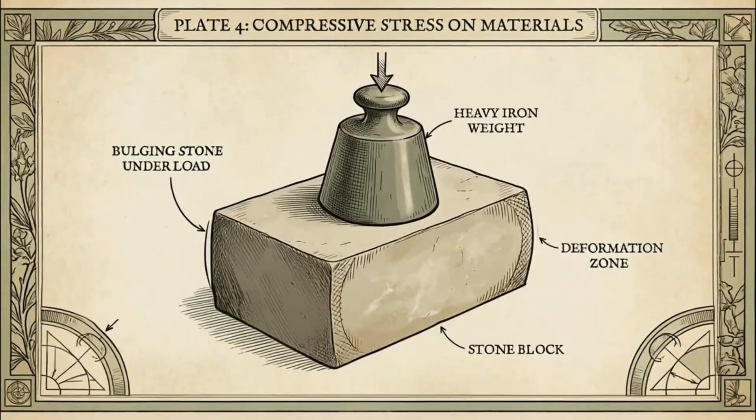Every structure follows 4 rules. Break just one, and it fails. Not because the material is weak, but because of how it behaves under load. Those 4 rules are strength, stiffness, stability, and synergy.

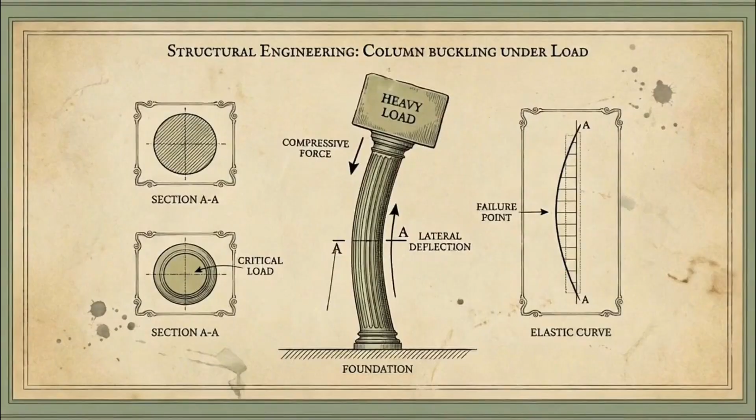Most people only think about strength, but strength alone is not enough, because structures don't just fail by breaking. They fail by bending, by becoming unstable, or by not working as a system. To understand why structures succeed or fail, you have to understand how all 4 work together. Let's start with the most intuitive: strength.

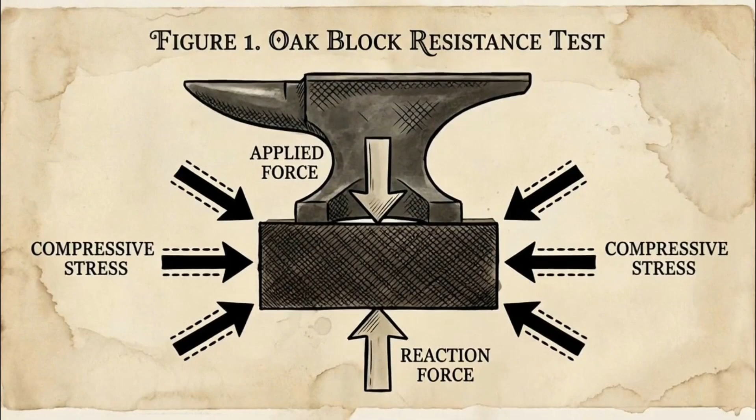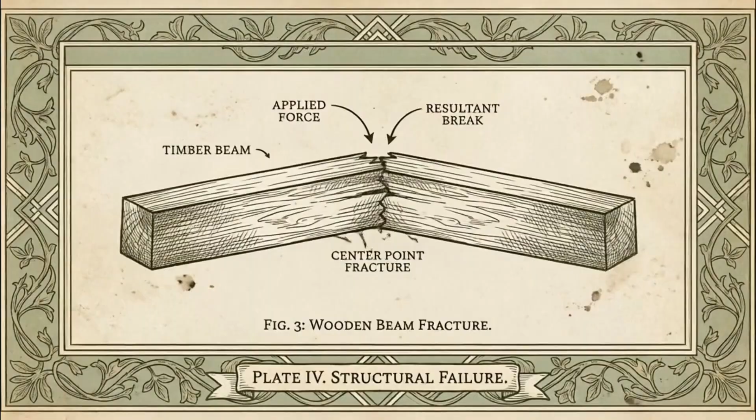Strength is the ability to not break. When a beam carries load, it develops internal forces. The top gets compressed, the bottom gets stretched, and if those forces become too large, the material fails. That's the simplest form of structural failure. And in brittle materials, like concrete or unreinforced masonry, this can happen suddenly with almost no warning. So strength is about survival.

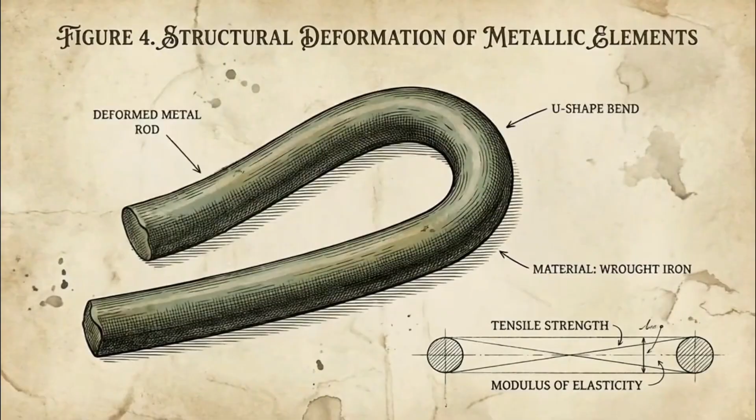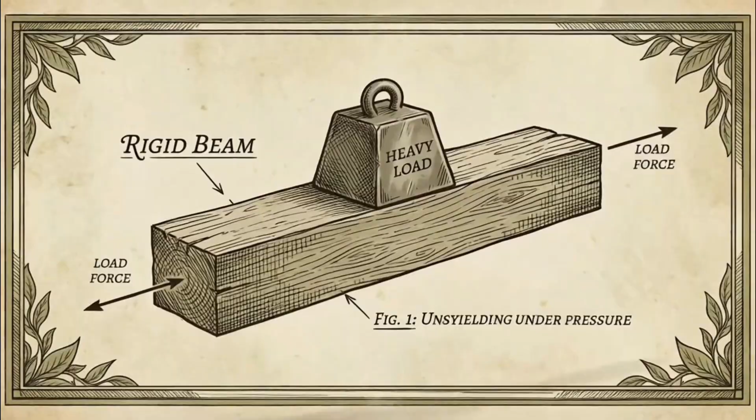But here's the problem: a structure doesn't have to break to fail. And this is where most people misunderstand how buildings work. Because many failures don't start with breaking, they start with bending. This is stiffness. Stiffness is the ability to resist deformation. 2 beams can carry the same load without breaking, but one might bend much more than the other. And that difference matters, because excessive deflection creates real problems.

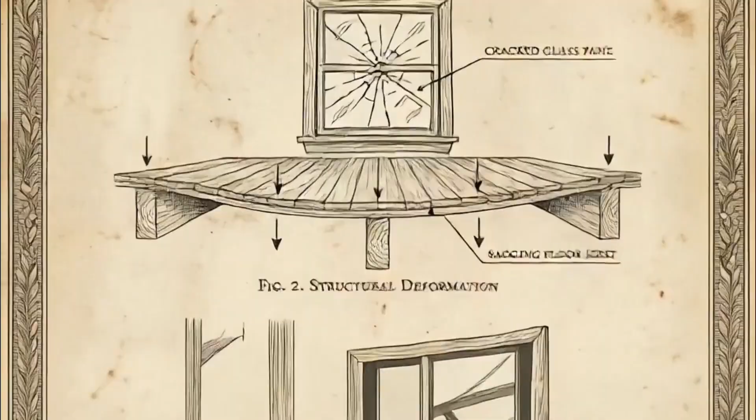Floors feel soft, beams visibly sag, walls crack, doors stop closing properly. The structure is still standing, but it's no longer performing. That's a stiffness failure. And stiffness is not just about material, it's about geometry.

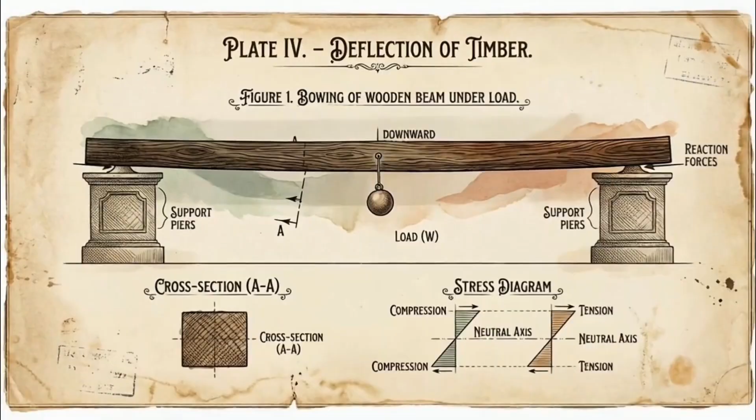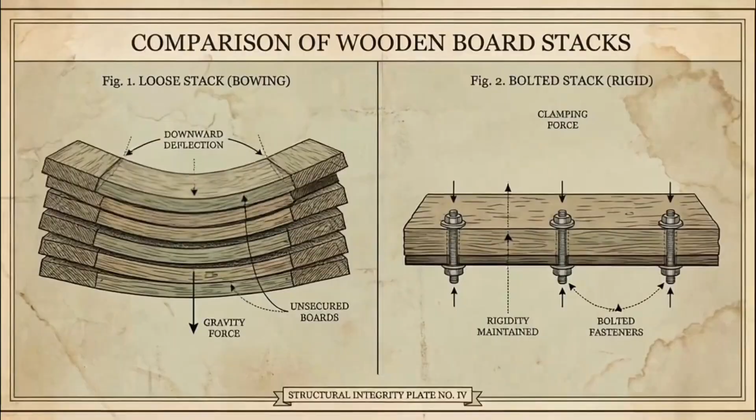Here's where things get interesting. Take a single wooden board, it bends easily. Now take multiple boards. If you just stack them, nothing really changes. They still bend, but if you connect them, so they act as one piece, everything changes. Now the structure becomes dramatically stiffer. Not twice as stiff, not 10 times, but sometimes hundreds of times stiffer. Same material, same amount, completely different behavior.

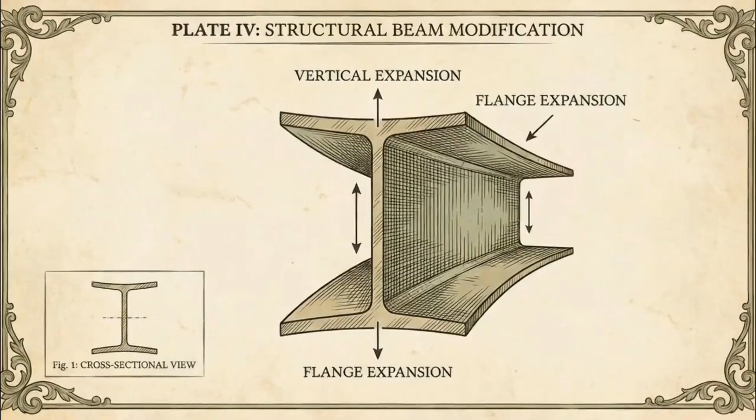And the reason is simple: material placed farther from the center works harder. So when you make a beam deeper, you're not just adding material, you're placing it where it matters most. That's why a tall beam is exponentially stiffer than a flat one. And this is one of the most important ideas in structural design. Performance is not just about what you use, but where you put it.

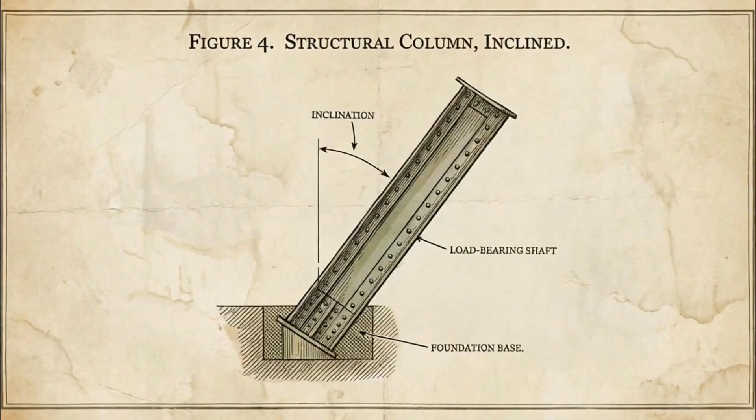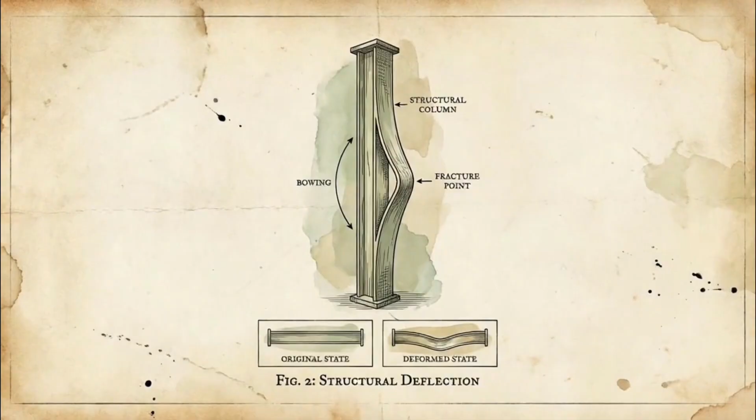Now, even if a structure is strong enough and stiff enough, it can still fail. Not by breaking, not by bending too much, but by losing its balance. This is stability. Stability is the ability of a structure to maintain its position and shape under load. Because sometimes failure doesn't come from the material, it comes from the geometry. Take a vertical column. Under compression, you might expect it to simply crush. But in many cases, it doesn't. It bends sideways and collapses suddenly. This is called buckling, and it can happen even when the material itself is strong enough.

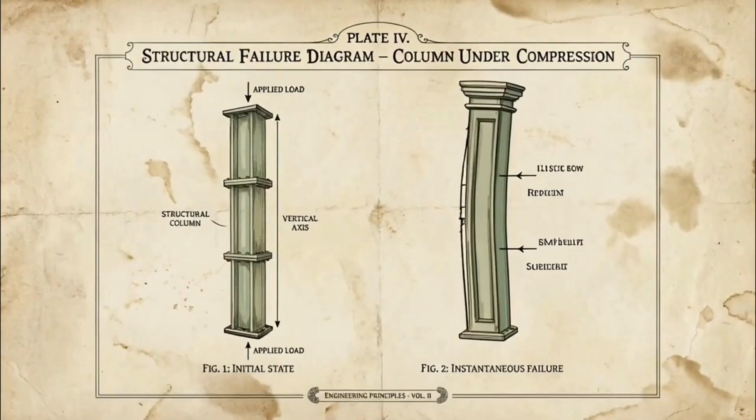What matters here is not just the material, but the proportions. A short, thick column can carry a lot of load, but a tall, slender one can fail much earlier. Same material, same load, completely different outcome. Because instability is driven by shape, and the dangerous part is, it happens suddenly. There's often no visible warning. The structure looks fine right until it isn't.

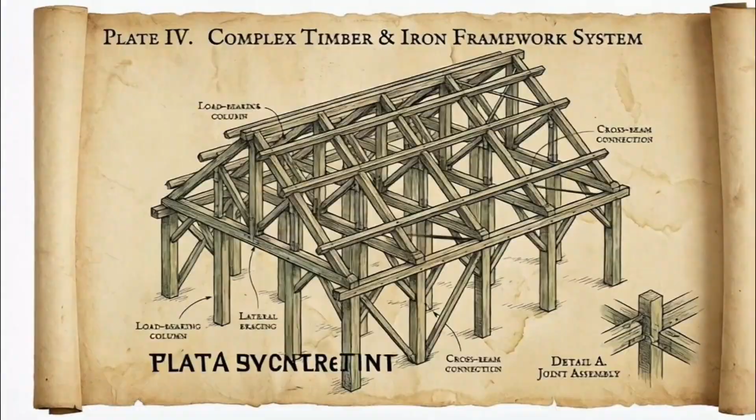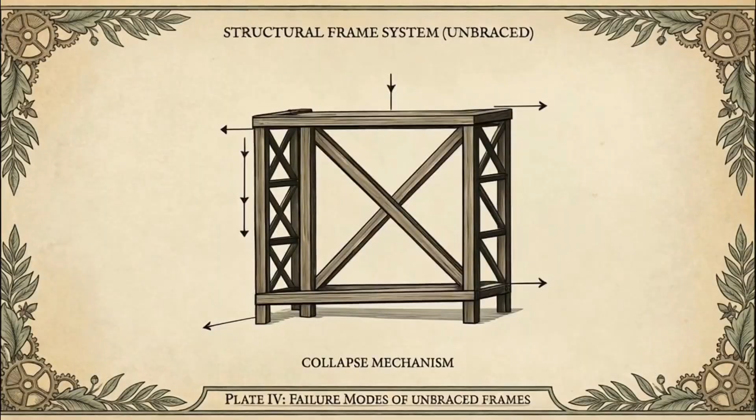And this doesn't apply only to columns. Entire systems can become unstable. A frame without proper bracing can collapse sideways under lateral forces, like wind or seismic movement, even if every beam and column is individually strong enough. Because stability is not about individual elements, it's about the system as a whole, maintaining equilibrium. So strength prevents breaking, stiffness controls bending, but stability is what prevents sudden collapse. And without it, everything else can fail instantly.

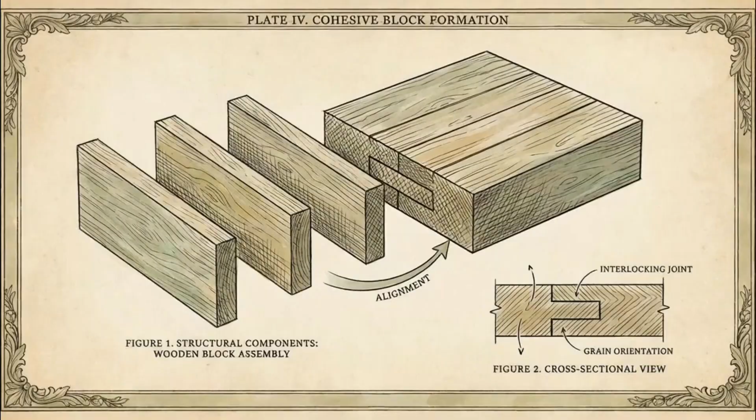Now, even if a structure is strong, stiff, and stable, there's still one more thing that determines how it actually performs. And this is where design becomes much more interesting. This is synergy. Synergy is the ability of all the parts to work together as a system, because a structure is never just one element. It's a collection of components. Beams, columns, connections, and how they interact can completely change the outcome.

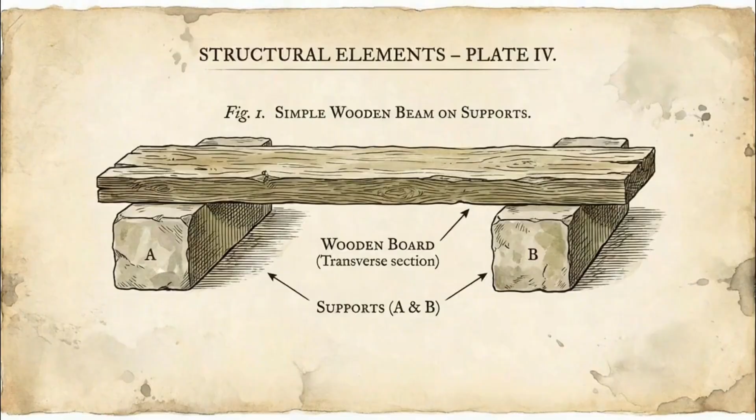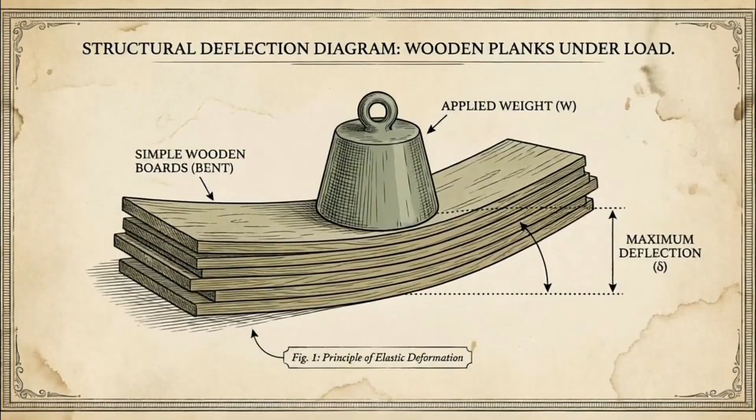Take a simple example. A single wooden board is easy to bend. Now, take several identical boards and stack them together. You might expect the stack to be much stronger, but if they're just placed on top of each other, they still behave independently. They slide, they separate, they don't share the load effectively, so the performance barely improves. But now, connect them, glue them, fasten them, make them act as one piece, and suddenly, everything changes.

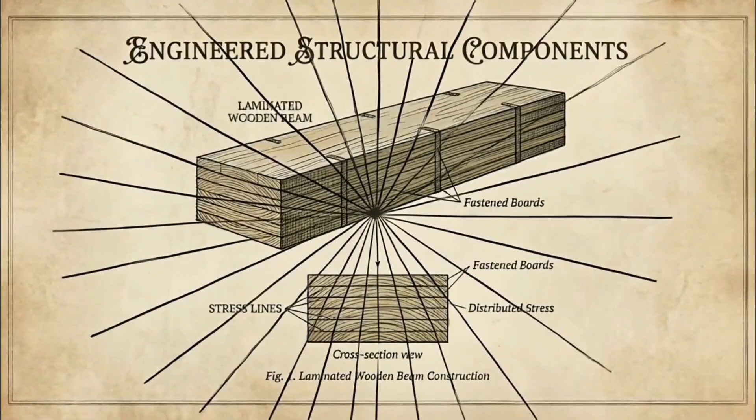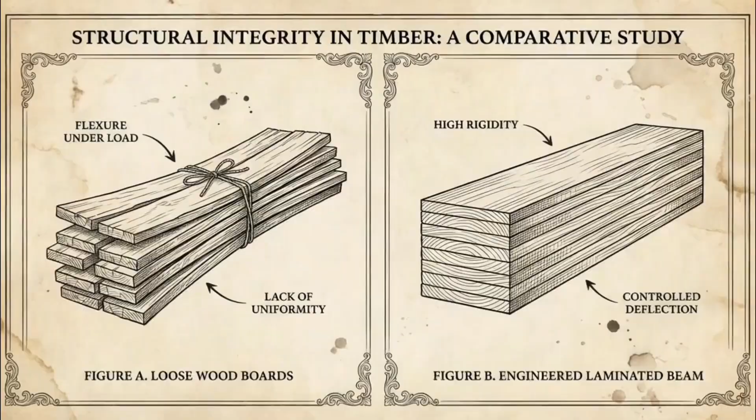Now the load is distributed across the entire section. The elements stop working individually and start working together. And the increase in performance is not small. It's dramatic. Same material, same quantity, completely different behavior. And this is the idea behind engineered systems, like laminated beams and framed structures and well-designed connections.

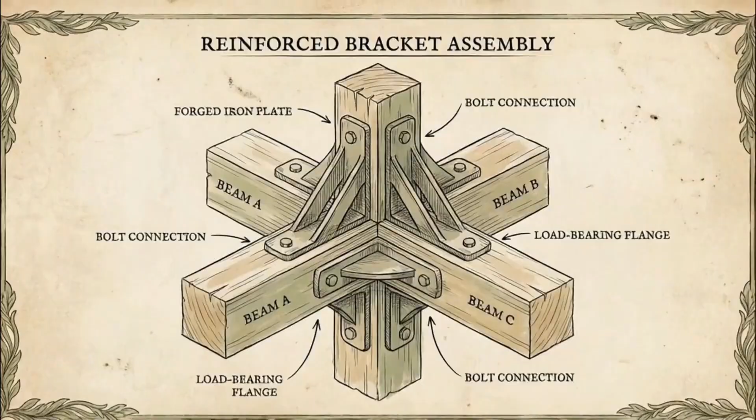Because in real structures, the connection is often more important than the element itself. A strong beam with a weak connection is still a weak system. But when everything is connected properly, the structure becomes more than the sum of its parts. That's synergy. And this is what ties everything together. Strength, stiffness, and stability define how individual elements behave, but synergy defines how the entire system performs.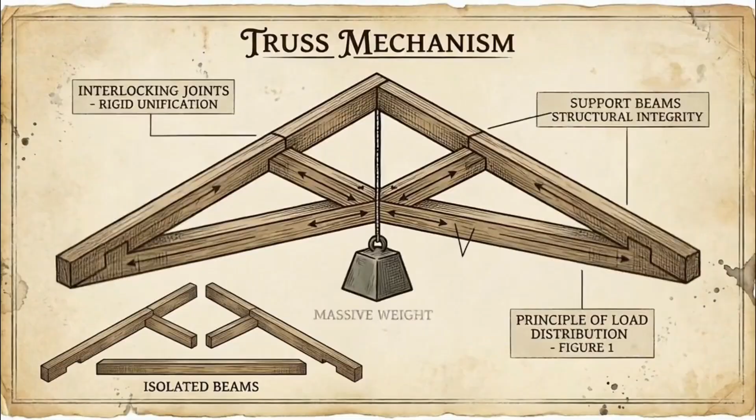So in the end, a structure is never judged by just one quality, not by strength alone. Because something can be strong and still fail. It can bend too much, it can become unstable, or it can simply fall apart because the parts don't work together. Real performance comes from balance, from getting all four right: strength, stiffness, stability, and synergy. Miss one, and the system breaks.

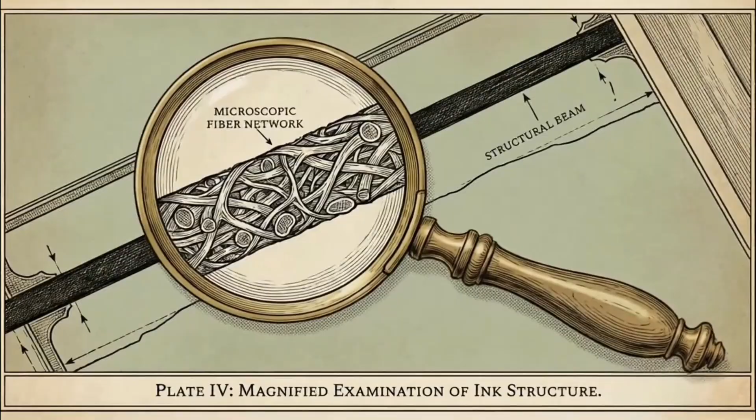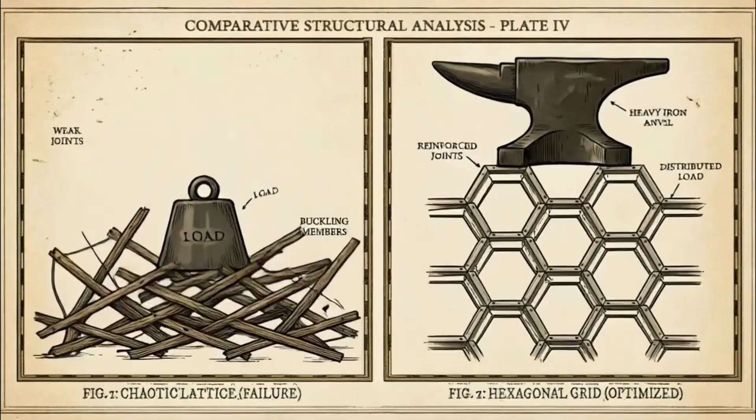And once you start seeing structures this way, you realize something most people miss. Failure is rarely about the material. It's about the design. Because the same material, arranged differently, can either fail or perform exceptionally. And that's the real difference between something that just stands and something that's truly engineered.